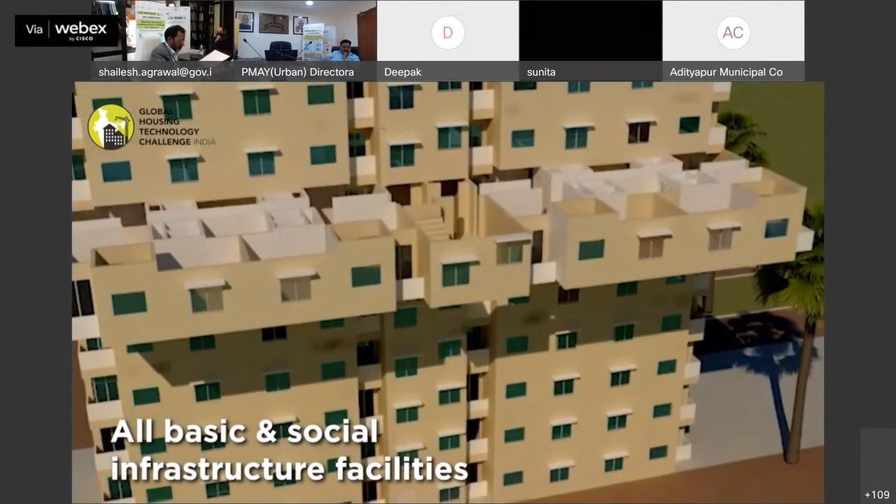A lighthouse project using precast concrete construction system, 3D volumetric, with 1008 dwelling units in G+8 configurations, along with all basic and social infrastructure facilities, is being constructed at Ranchi in partnership with the State Government of Jharkhand. The Honorable Prime Minister laid the foundation stones of 6 lighthouse projects, including at Ranchi, on 1st January 2021.

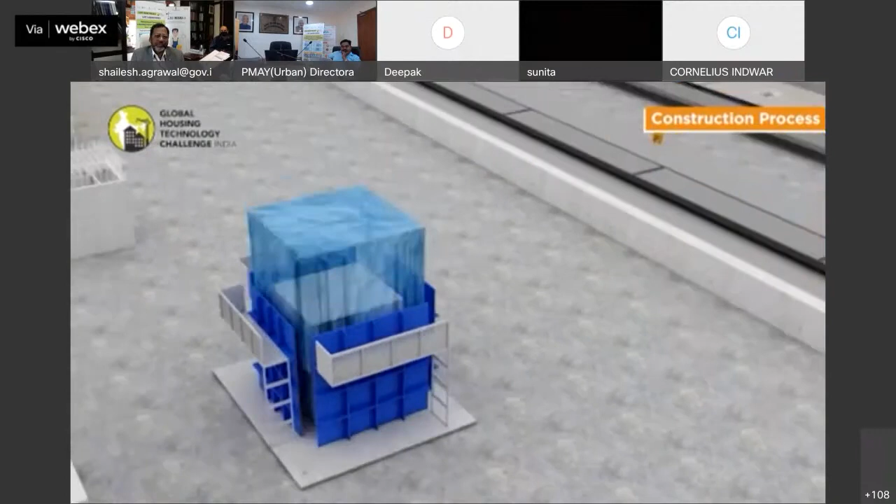Due to ground level issues, the actual construction work of LHP Ranchi could start only in August 2021. The construction work of this project is now in full swing. This 3D volumetric construction system is being used for the first time in construction of houses under PMAY-U. In this fast track system, solid precast structural modules like room, toilet, kitchen, bathroom, stairs, etc. are being cast monolithically in a casting yard at site under controlled conditions.

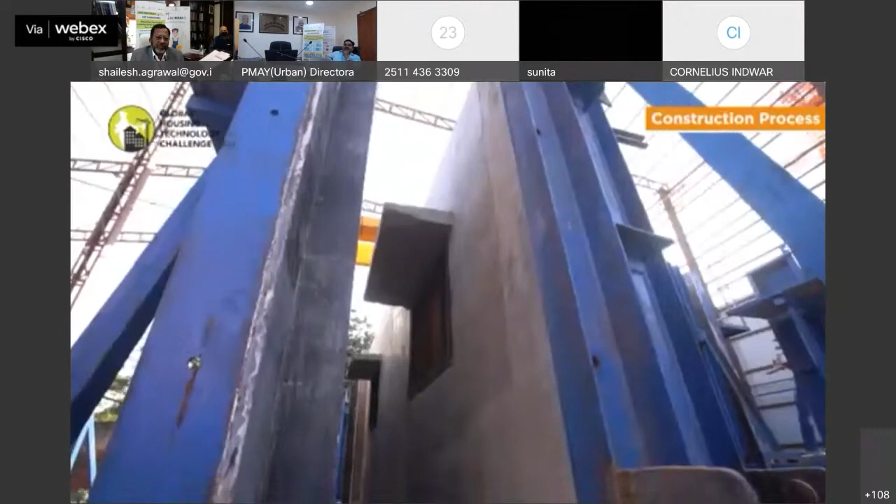In this modern system, construction begins with keeping the design foundation of the building ready while manufacturing of precast concrete structural modules takes place in the casting yard. Finished rooms, toilets, kitchens, and bathrooms are then installed at the site with the help of tower cranes. Gable end walls are positioned to terminate the sides of the building.

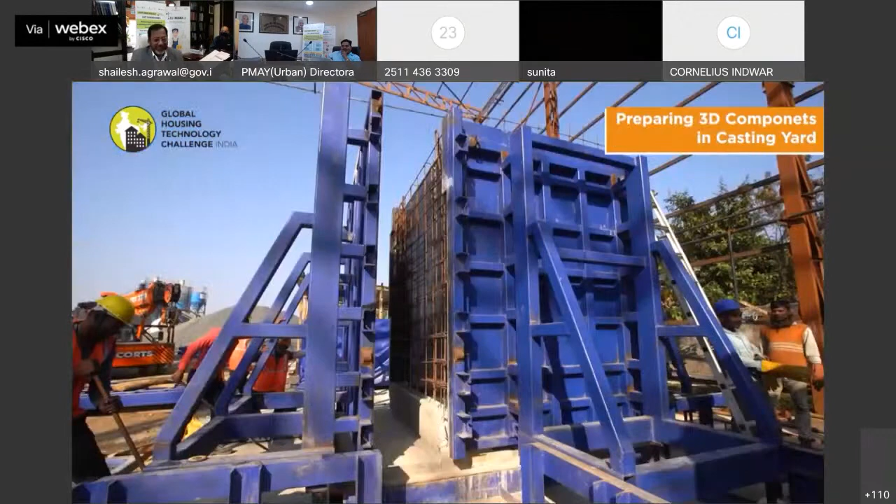Pre-stressed slabs are then installed as flooring elements. Rebar mesh is placed for structural screed, thereby connecting all the elements together. Consecutive floors are then built in a similar manner to complete the structure. About 90% of building work, including finishing work, is completed in the casting yard, which saves overall construction time.

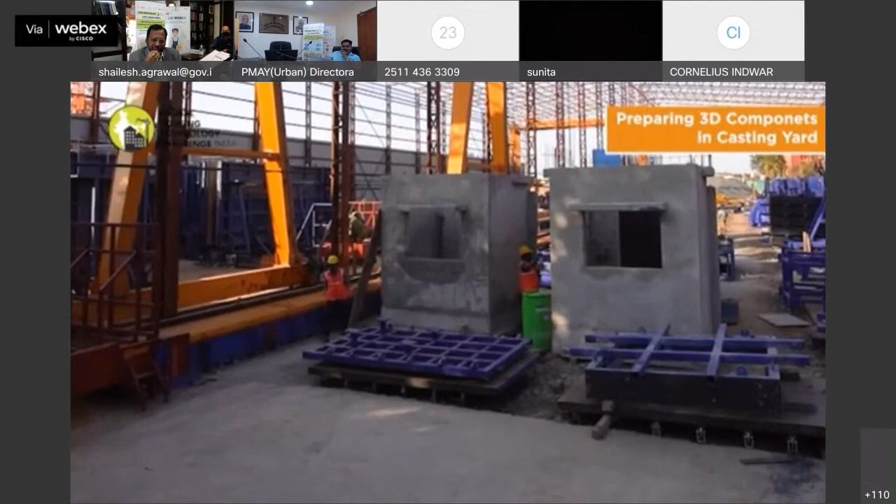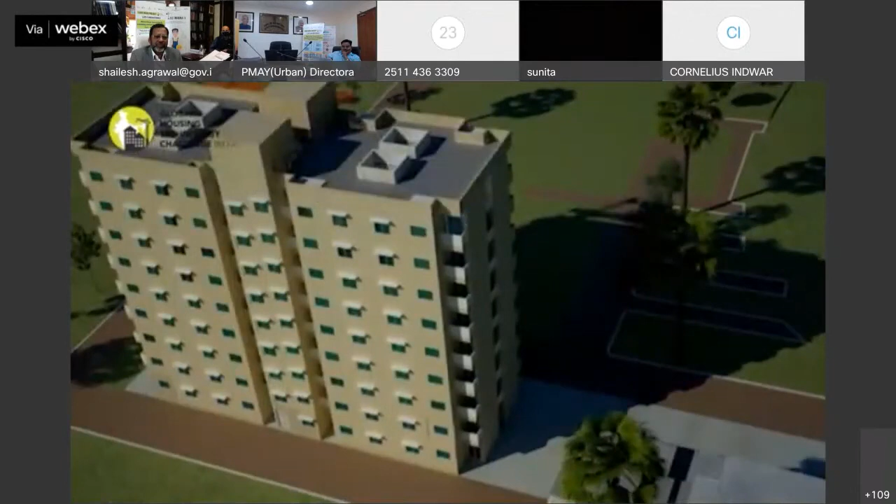The casting yard adjacent to the construction site in Ranchi, with all facilities, is now functional and is being used for the production of precast 3D and other components. While the casting yard facility was being established, raft foundations for all 7 towers were initiated, which are now at different stages of construction. Once foundation work up to the grade slab is completed in a tower, precast 3D components getting ready in the casting yard will be installed at the site to complete the tower. With all these parallel activities, the project is progressing well and is expected to be completed well within the stipulated time.

There is tremendous response for booking these houses by beneficiaries. The LHP Ranchi is serving as a live laboratory for learning. About 200 technocrats and other stakeholders have visited the site to learn the use of innovative technology in a real project at site.

So with this, let me start my first lecture. First, we will try to explain the 54 new construction systems which have been shortlisted by the Ministry of Housing and Urban Affairs through the Global Housing Technology Challenge, and I will quickly explain the 6 categories. After that, we will get into the LHP project at Ranchi and discuss with you in detail the technology being used in the lighthouse project at Ranchi.

So I will first explain all these 6 broad categories pictorially in a very simple way. This is just to give you the progress of Pradhan Mantri Awas Yojana.

Most of you might be aware, we're working with SLTC, CLTC, SLNA and others. The sanctioned houses are now more than 1.2 crores, out of which 95 lakh have already been grounded and 56 lakh have already been completed and delivered.

And believe me, this figure is changing dynamically very fast. Through PMAY, we are able to generate direct and indirect employment to the tune of 2.33 crores, and overall cement and steel consumption is also in million tons.

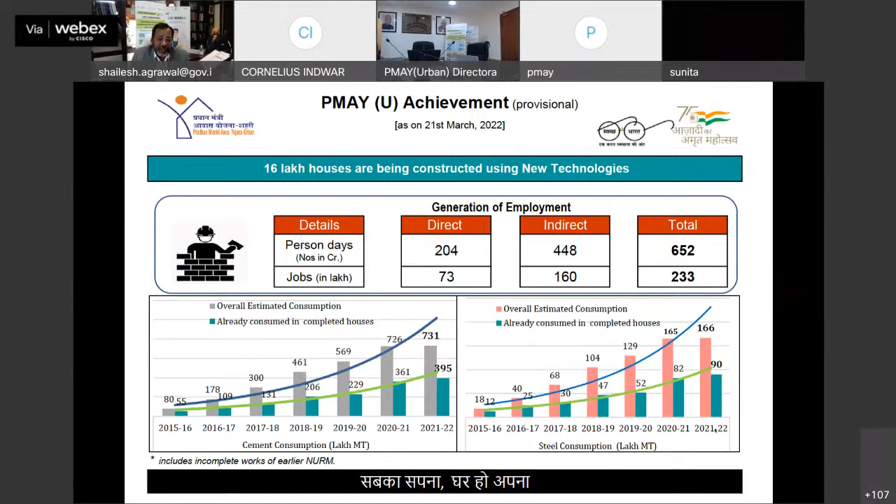Also, because we are running a technology mission under Pradhan Mantri Awas Yojana, through which new construction systems, alternate ways of construction, energy efficient and eco-friendly building materials and techniques are being promoted in various states, through that technology mission we are constructing 16 lakh houses using these new technologies, which I'm going to discuss with you.

This all started with the Global Housing Technology Challenge, organized on 2nd and 3rd March 2019. It was inaugurated by the Honorable Prime Minister, and during this challenge, we organized a big conference-cum-expo where more than 100 global technology providers participated and showcased their various innovative construction systems.

You might find the word 'challenge' here. The challenge thrown to the world was to share with us the technologies and construction systems which can help build the maximum number of houses in minimum time and minimum cost. So the challenge was: do we have that kind of technology or construction system?

Let me share with you that through the Global Housing Technology Challenge, we could identify 54 new construction systems, which are divided into six broad categories. I will definitely explain all these 6 technologies through pictures.

Right now, these 6 broad categories are being showcased at these 6 lighthouse project sites. So this is the basket of 54 technologies - depending upon your project requirement, time and cost, and the finance available, you can choose any one of these technologies suiting your requirement.

Another point I want to make is that while shortlisting these technologies, a technical evaluation committee was formed, comprising DG CPWD as its chairman, and persons from academic institutions, research institutions, PSUs, and other organizations. That committee shortlisted these 54 new technologies.

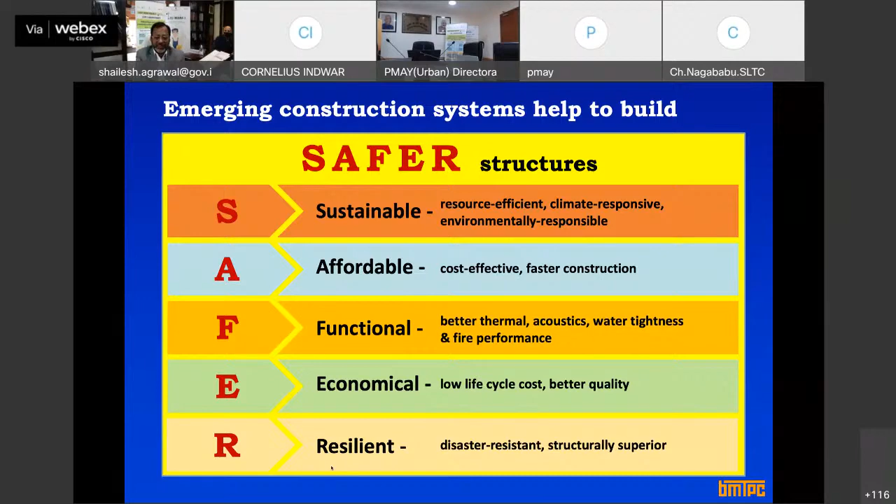There was also a study by the Energy and Resources Institute which says that by moving towards sustainable development, you can considerably reduce energy use, by 30 to 50%. You can also reduce water use.

You all know potable water is being used during construction, and that water reduction can be done up to 40% by taking the construction to the factory or offsite. It helps improve the environment or eco-friendliness, because we considerably reduce greenhouse gas emissions, and waste reduction is up to 75%.

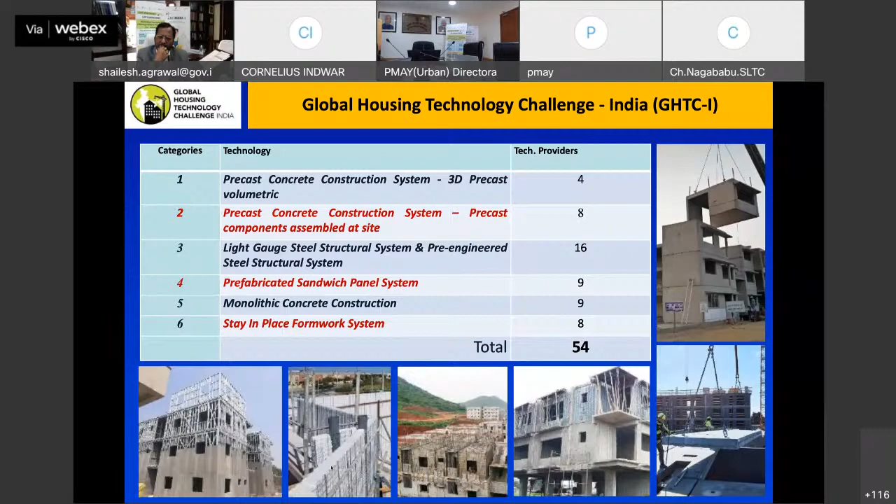So with this, let me explain these six construction systems. If you remember, I will go to that slide. These are the six systems, and I will explain pictorially, in very simple terms, all six technologies.

So first is 3D precast volumetric construction. You see here, in the right hand bottom portion, a picture which shows conventional construction. Normally construction takes place like this: cast-in-situ RCC frame construction, and then you have bricks, doors, windows.

What about this? Can't we replace this by a system where the entire room or entire module is made in the casting yard, in the factory, and then you put one over the other, like you put Lego blocks? So these are customized factory-made volumetric construction. You can have 4 walls, you can have both floors, or you can have one floor, depending upon the requirement. So this is 3D precast volumetric construction, replacing your RCC framed beams and columns by this 3D module, or a volumetric construction.

Why is it called 3D? Because it is a volumetric construction comprising of L, B, and H. So like this, you can construct the entire building, and this is what we are using in LHP Ranchi, which we will show you in a later part of the webinar.

These are the actual stages of 3D volumetric construction. What you have to do is prepare a reinforcement cage, then have a mold, and insert it - we will show you a live demonstration. This reinforcement cage is inserted into a mold, then concreting is done, and then the mold is demolded, and the entire module is taken out, cured, and transported to the site.

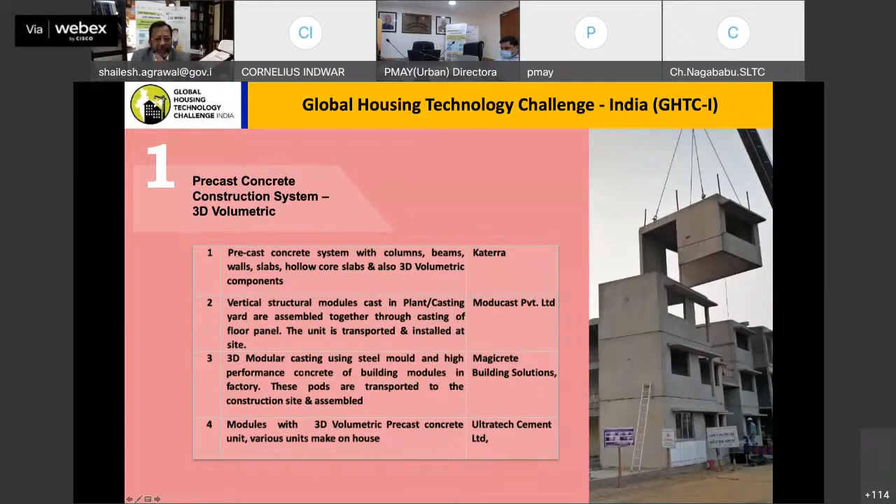Under 3D volumetric construction, through the Global Housing Technology Challenge, we could shortlist 4 agencies which are listed here. The project at Ranchi is being done by Magicrete Building Solutions, who are pioneers in bringing this technology to our country - 3D modular casting using steel mold and high performance concrete. So this is the Ranchi project. Anyway, we will go into the details of this project later.

Next is precast concrete construction. The difference from earlier is this: there we made a volumetric construction where we have all 4 walls, and a slab or without slab - so it's an enclosure, a module, or a block.

Whereas in 2D precast concrete construction, we just make 2D planar elements. It can be a beam, a column, a wall panel, a facade, a staircase. So all these structural elements, whether beam, column, or wall, are made in the casting yard or factory, and then transported to the site, erected, assembled, and used. So that is 2D precast concrete construction - you can see these elements.

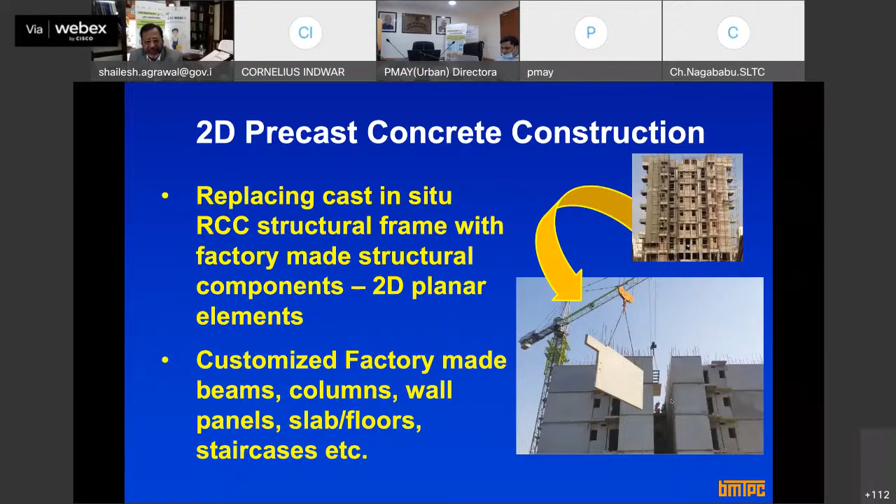So these are slab elements, this is a staircase element, this is a wall panel, this is a solid slab, this is a hollow core slab, these are spandrel beams, these are staircases. All these are cast in the factory and then jointed together to create a building or whatever shape you need.

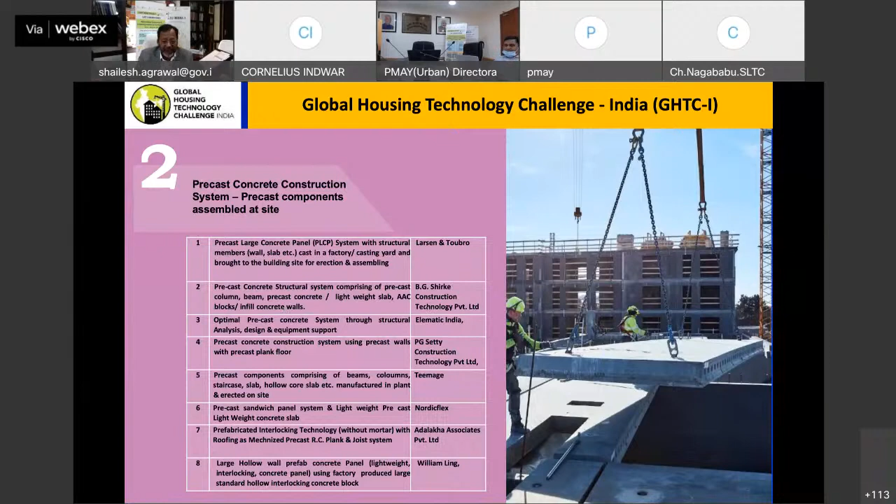Through the Global Housing Technology Challenge, 8 agencies were shortlisted, and we are using this technology in Chennai, where BG Shirke is doing the project. Already the project is more than 90% complete, and very soon it will be handed over to the state level nodal agency. So this is about precast concrete construction, and this is the progress.

You can see this beautiful photograph - this is the actual photograph from the site, and it was taken, I think, a week back. Now the progress has gone much further ahead.

So you can see this entire work is almost over. This is what is shown here: they make these columns and beams, and that casting yard is just adjacent to the site where casting of all these structural elements takes place. Let's move to the next category.

Next category is pre-engineered steel structural system and light gauge steel structural system, and this one we are using in 3 projects, namely Agartala, Lucknow and Indore. Here, instead of cast in situ RCC column and beam, we have factory made steel columns and beams.

These are steel built up sections. If you are interested, let me tell you that normally we have hot rolled steel sections - I sections, channel sections, or angle sections - which are hot rolled, and those shapes are ISI mark shapes.

But nowadays, with the advancement of manufacturing technology in steel, you can have built up sections, and the moment we have gone for built up sections, it has opened ample opportunities to make use of steel structural sections in building construction and other structures. So we get smaller built up sections, which can be rectangular, hollow, or square.

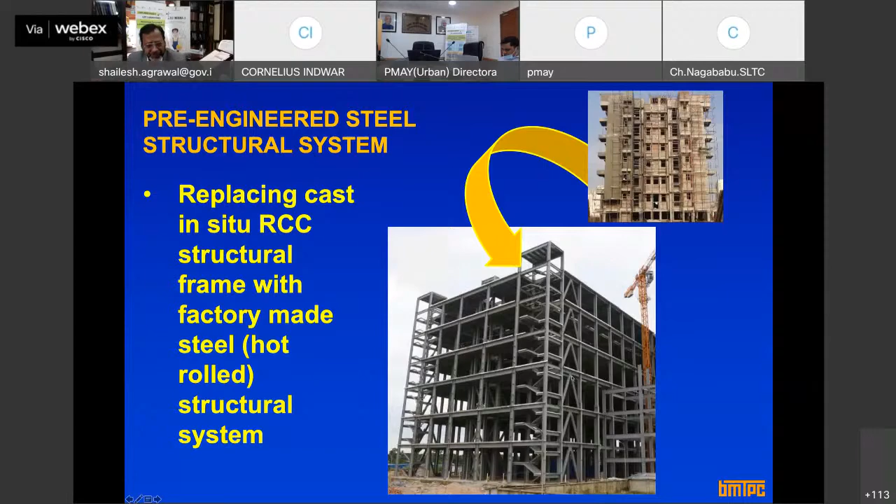These sections can act as beam and column. They are manufactured in the factory and then brought to the site and erected to create a steel structural system or skeleton of a building, which you can then fill with drywall construction. You can see this picture - this is steel, again from one of the project sites. These are those steel beam and columns, and then you have a slab, and this is the wall, the infill wall.

Another category is the light gauge steel structural system, which is being used in Agartala in combination with the steel structural system. So these are light gauge - this is cold form steel.

The manufacturing here is cold form, whereas hot rolled steel is manufactured where the steel is put in a furnace and melted, then rolled in hot form. Here it is cold formed through machines, and we also have a lighter section. That steel is then galvanized, so we get corrosion resistant, galvanized steel light gauge panels, which can act as walls as well as be used for laying floors.

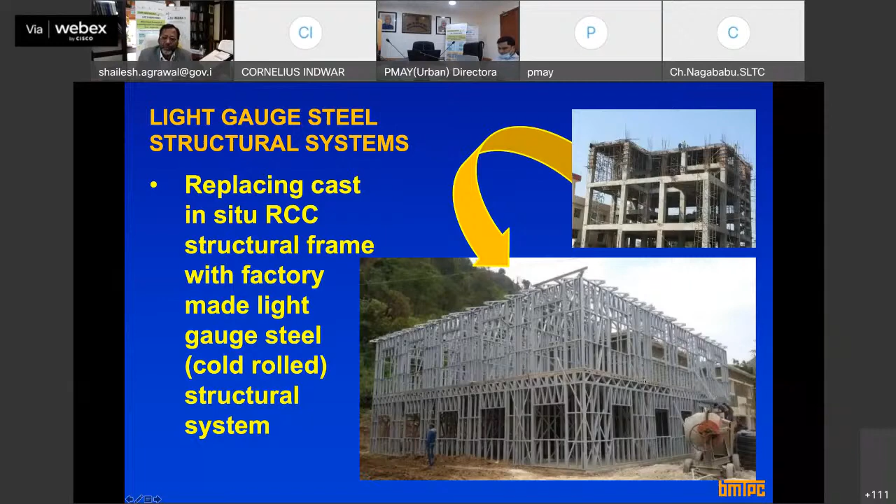This is the light gauge steel structural system being used in Agartala, and we have shortlisted 16 new agencies already working in this area of light gauge and steel structural systems. The project we are doing in Agartala is being done by... yeah, this is the company doing the Agartala project using steel and light gauge steel structural system.

This is that Agartala project I was talking about. If you can see this portion in the bottom right hand side, you'll see that this is the steel structural system used for the skeleton, and then the walls are made of light gauge panels - that is a light gauge panel being used here.

Now let's move to the next category: drywall construction, also known as sandwich panel system. There are many varieties of sandwich panel systems now available in India, and for the sake of clarity, we have divided them into 2 categories. One is the EPS panel system.

What you see here on the right hand side, top portion, is the EPS panel. This white thing is expanded polystyrene - it's a thermocol of high density. If I have to tell you casually, EPS is expanded polystyrene, but for your understanding, think of it as thermocol of high density.

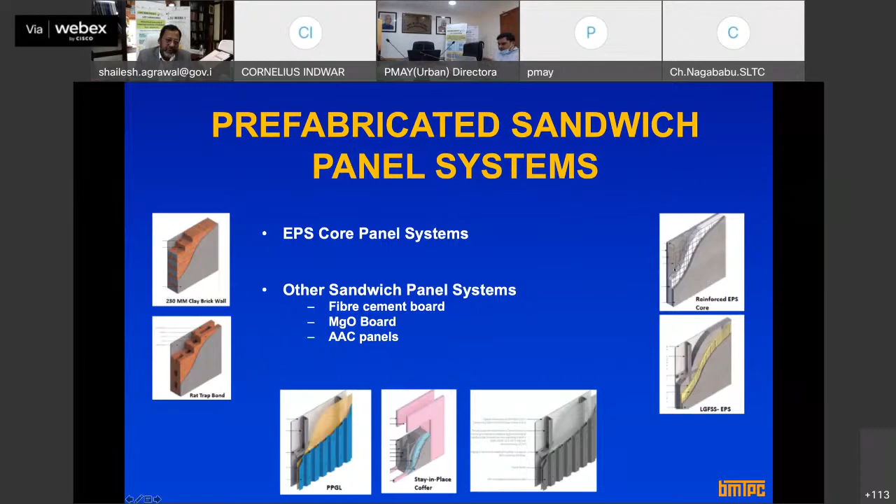So the light gauge steel structure I showed you can be put with these kinds of panels. You can see these panels here. This kind of traditional brick wall construction is being replaced by drywall made in the factory. All the openings you see, whether ventilator, window, or door, can be cut on site easily with the help of equipment, cutters and all.

Otherwise, they can also be cut in the factory and given to you in customized form. This is the EPS panel system I was talking about, and the white thing is the EPS panel. The core is sandwiched between two welded wire mesh, galvanized welded wire mesh, and then you do the plastering or you can do shotcreting.

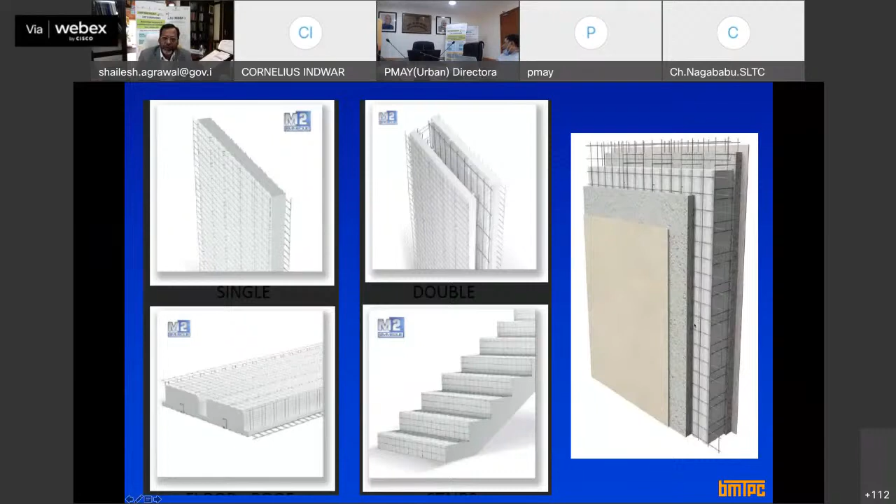This can be used as a staircase or as a slab, and you can do the plaster. You can put a fiberboard and all.

Through Global Housing Technologies, 9 agencies were shortlisted, and this technology is being used in Indore by the company Rising Japan Infra Private Limited. As I told you, these panels are named according to the outer skin and the core. So they are using an EPS cement sandwich panel system, which has calcium silicate board as outer skin, and in between they fill it with aerated concrete, a special kind of lightweight concrete. That is being used in Indore in a hybrid form along with the steel structure system.

It's shown here. This is the lighthouse project at Indore where that sandwich panel system technology is being used. These are the sandwich panel systems.

Now imagine instead of replacing your brick wall or stone masonry construction with these kinds of EPS panels, cement EPS panels, which are manufactured in the factory, you just put them through a slide and lock arrangement to create your wall, requiring no water, and it can be done pretty fast.

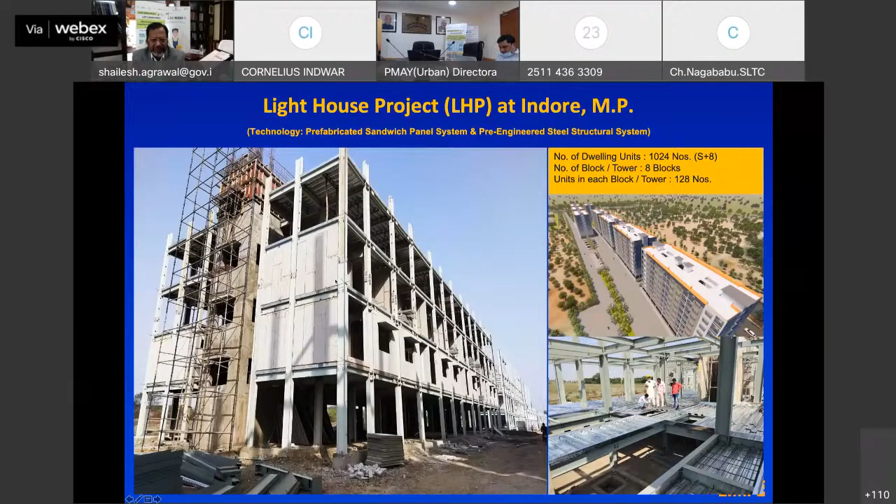This is the panel I was talking about from Rising Japan, which is being used in Indore. So what you see here is this panel, the aerated concrete sandwiched between two calcium silicate boards.

The next category is monolithic concrete construction, which all of you must be knowing. This is also known as aluminum formwork or Mivan. Mivan was the company which started this aluminum formwork in our country around 10 years back, and now we have more than 50 formwork manufacturers in our country.

This is customized formwork. Instead of having steel or plywood formwork made separately for your beam, column, and slab, for the entire house or module you can have customized aluminum formwork made, and then you put the reinforcement cage in a single pour. You can make the room or dwelling.

There were 9 companies or agencies shortlisted under the Housing Technology Challenge, and those are given here. The work we are doing in a project in Rajkot is given to Outinord, where we are using a tunnel formwork system.

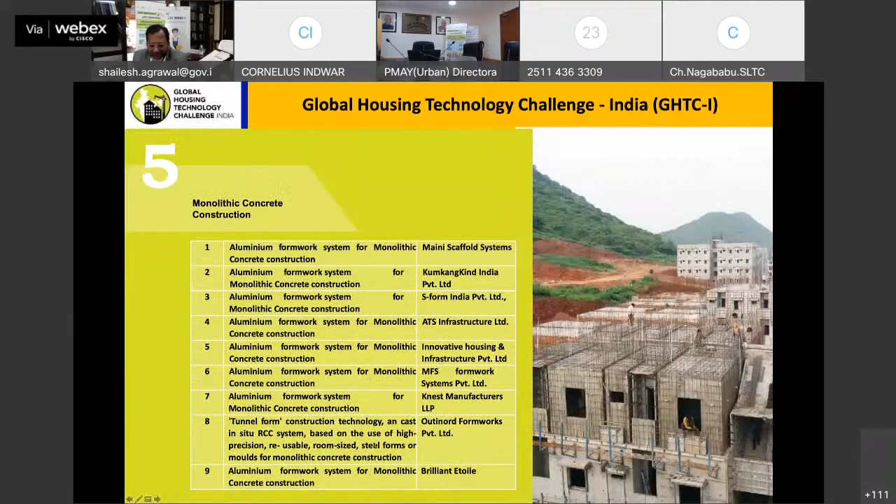The difference between tunnel form and this kind of formwork is that in monolithic concrete construction, we have formwork for all 4 walls, so we make the entire room at once. Whereas in tunnel formwork, it comes in the form of an L, so we make a slab and 2 walls, creating a tunnel kind of thing. The outer walls are later filled with AAC blocks or any other filler material. I will show you the picture.

So this is that formwork, it comes in this form and creates the tunnel. So all these tunnels on one floor, 8 dwelling units, are being cast in 3 days in Rajkot.

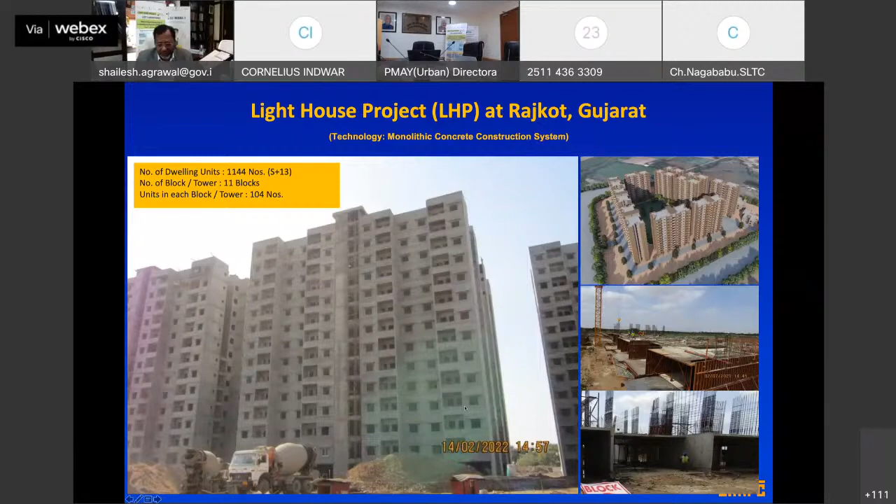You can see for yourself by visiting this project. So this is the tunnel formwork I was talking about, an inverted L kind of thing. You fix this formwork and create the tunnel kind of structure, and then later on, to create a room, you fill the outer walls with any kind of masonry.

The next system is the stay-in-place formwork system. Here the formwork is left in the structure, or it stays with the structure, which is why it's called a stay-in-place formwork system. It's also known as sacrificial formwork or lost formwork system.

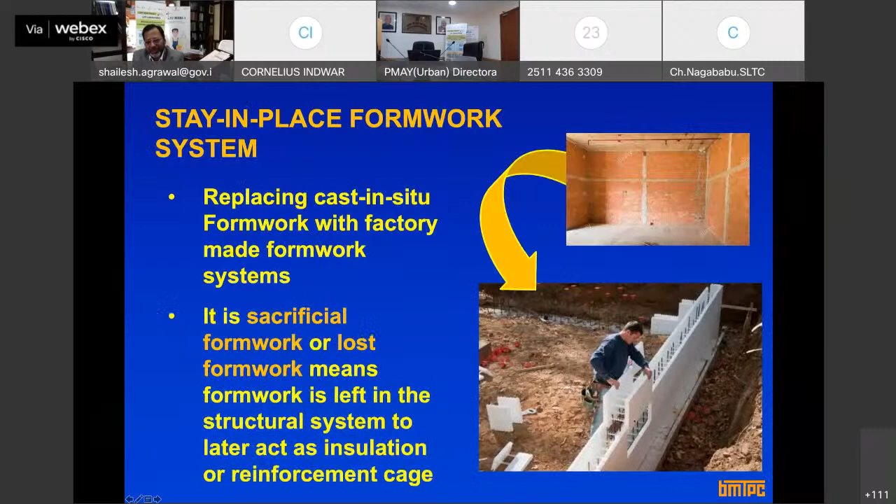Let me show you this picture. This is the formwork we're talking about. It comes in the form of blocks, customized and made in the factory. You put these blocks in a slide and lock arrangement to create this wall with openings cut as needed, and then fill it with concrete and do the plaster. So it acts first as formwork, and then as insulation to your building. That's why it's called insulating concrete formwork system or stay-in-place formwork system.

We could shortlist 8 agencies with this stay-in-place formwork system, and this technology is being used in Lucknow. The agency is Novel Assembler, who is using a PVC stay-in-place formwork system. These are pre-finished walls. I will show you a slide.

So these are pre-finished walls. It's like buying a wall, pre-finished, with different coloring options. You can buy the wall from the factory or from the market and just assemble it or install it to create a wall.

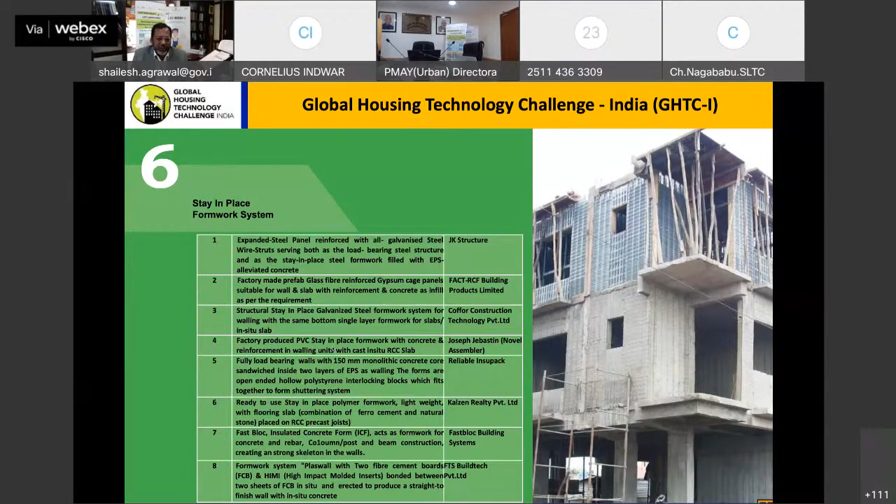This is being used in Lucknow, and let me show you this picture. This is the PVC wall form, and it's being used in a hybrid form because it's a high-rise structure—so it's a steel skeleton or beam and column, and the walls are of this PVC wall form.

This is the slide of the PVC wall form I am talking about. If you have difficulty remembering stay-in-place, you can just say pre-finished PVC wall or pre-finished walls.

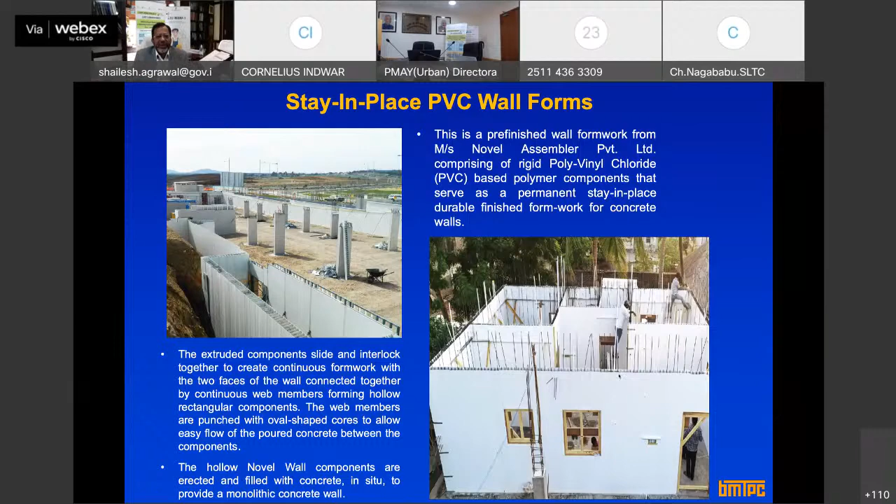The outer skins are of PVC, and these are cavities which can be filled with concrete or lightweight concrete, and you can put the reinforcement. As you can see here, the reinforcement bars are coming out of it, and you can create openings by cutting, and fill it with concrete as per your requirement. This is being used in the LHP project at Lucknow.

So this was all about those 6 technologies I mentioned, explained pictorially. In addition to this, the Government of India, through the Technology Sub-Mission, is also facilitating and promoting this. We are also handholding the state governments and their technical agencies, development boards, PWDs, and other agencies engaged in construction of buildings and infrastructure.

In Andhra Pradesh, Chhattisgarh, and others—like in Andhra Pradesh, we recommended monolithic construction, and several lakhs of houses are being constructed there with monolithic technology, and now they're using precast also. So across all these states, we are promoting these technologies, and if you require any handholding or clarification, you can always write to the ministry or to us, and we'll help you in selection of the technologies.

The idea here is we have a basket of 54 technologies, and as per your requirement, geoclimatic condition, finances available, and time, you can choose one of them. In order to create a suitable ecosystem for all these technologies, they have already been approved by CPWD and the Ministry of Housing and Urban Affairs, and a schedule of rates for most of these technologies has also been published. Around 1.6 million houses are being constructed across India using these technologies.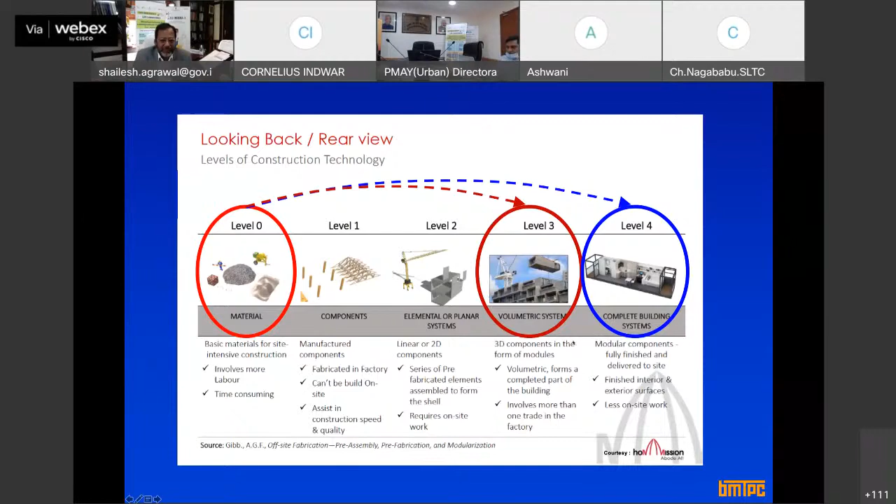So with this, let me end this first lecture, and now maybe we can start the next lecture. Manish? Yes, sir. Sir, I think your voice is muted.

Sorry. So the first lecture was all about the 54 new construction systems which we shortlisted and created a basket, and I explained pictorially those 6 broad categories. If you want more details of these technologies, you can register as a Technograhi - we are running an e-module, a certificate module, which gives you access to all the lectures and technical details. You can also go to the YouTube channel of BMTPC for audio-visual details about these technologies. For all 6 technologies, please visit the Ministry's website or BMTPC website, or our YouTube channel. You can also download certificates for these technologies, and the Delhi Schedule of Rates, which gives detailed specifications.

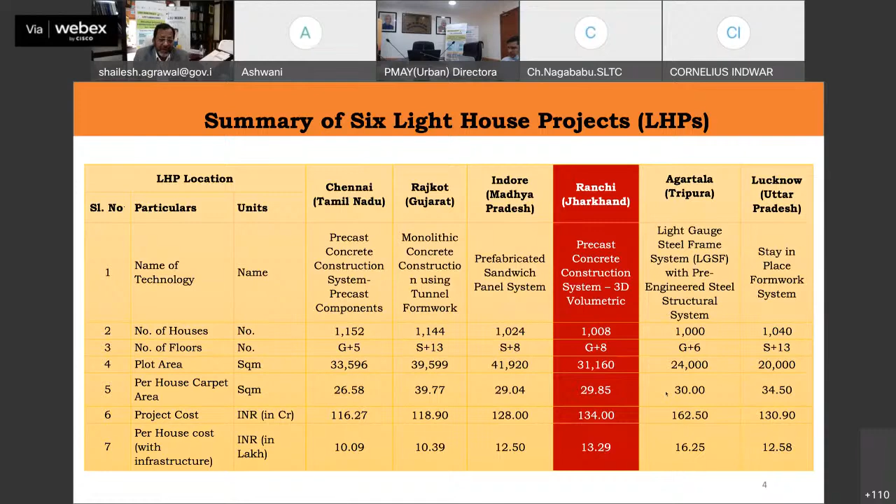These are the details of the 6 lighthouse projects we are doing. Today we discuss the Ranchi project, which comprises 1,008 dwelling units in G+8 configuration, with a project cost of 134 crore rupees. This is the first of its kind application of 3D volumetric construction in our country at such a large scale - 1,008 houses being constructed for the first time in India with this technology, in G+8 configuration.

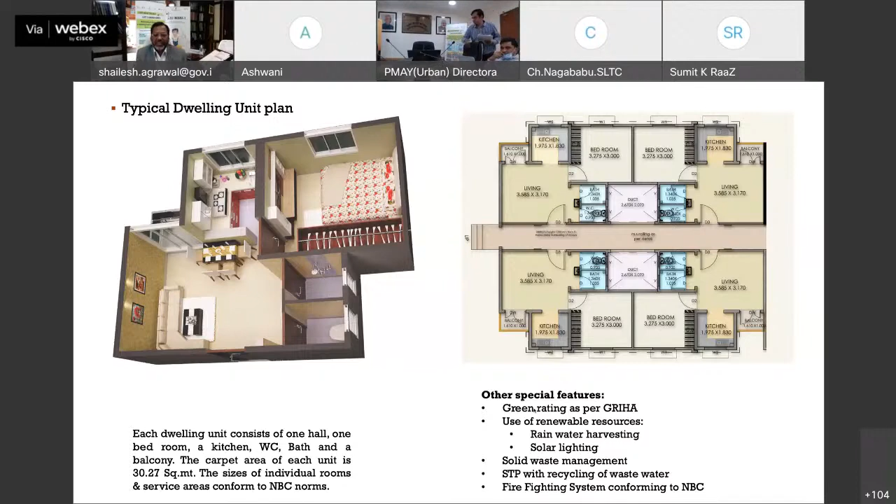Use of renewable resources is being promoted in terms of rainwater harvesting and solar lighting. Solid waste management is also part and parcel of all the lighthouse projects. Wastewater needs to be treated and reused for gardening and flushing purposes. All these projects, having 1,000+ houses, must have a sewage treatment plant and firefighting system because these are high-rise structures conforming to NBC.

Then on a foundation, they are assembled and erected, along with the services. You can either put the services in the casting yard or at the site—it all depends. Here, 70 to 80% of the work is done in the casting yard and then brought to the site.

Door openings and so on can be created in the casting yard, and you can even put in windows and other things—that's the next level, where you can have a pre-finished house. But in this project, we are creating the openings and putting the services in the casting yard, then bringing it to the site and putting one over the other to create the entire building unit.

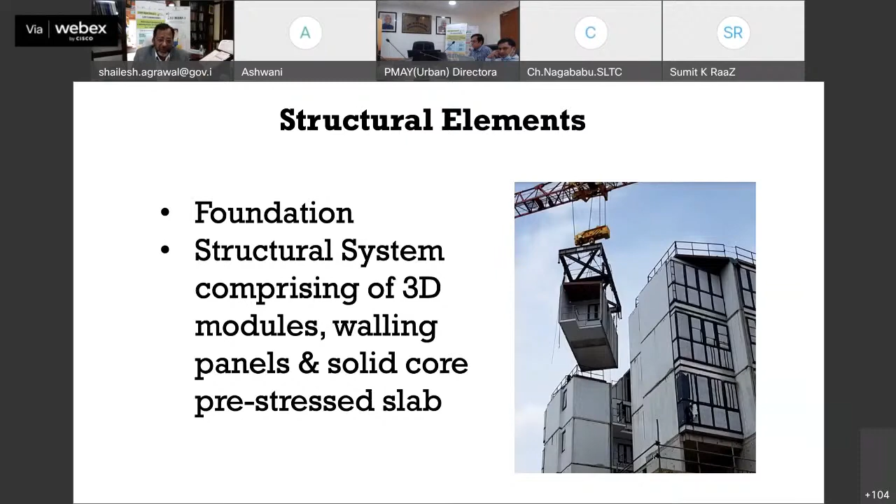Now let me explain the systems. Any building comprises a superstructure and substructure. The substructure is the structure below the plinth and below the ground. The superstructure is whatever we have above ground, explained in terms of structural system comprising beams, columns, structural system, and walling. The foundation is below that superstructure.

For all these projects, we are using conventional foundations. If you are a civil engineer or architect, you understand conventional foundations are of different types—it can be isolated footing, combined footing, raft, or pile foundation. Here we are using a raft because it's a 3D volumetric construction, as advised by the consultant.

If you have a rocky terrain, you can have isolated footings. If you have alluvial soil, you can go for raft or any other kind of foundation. It strictly depends on the geotechnical or soil investigation, bearing capacity, and depth of the foundation is decided based on the soil strata and the water table.

So we have a raft, and over that raft these shear walls are constructed, and they terminate at the plinth, and then these walls will be filled. We come to the finished ground level, and at the finished ground level these starter bars are left, and these starter bars will be connected with the modules which will come over.

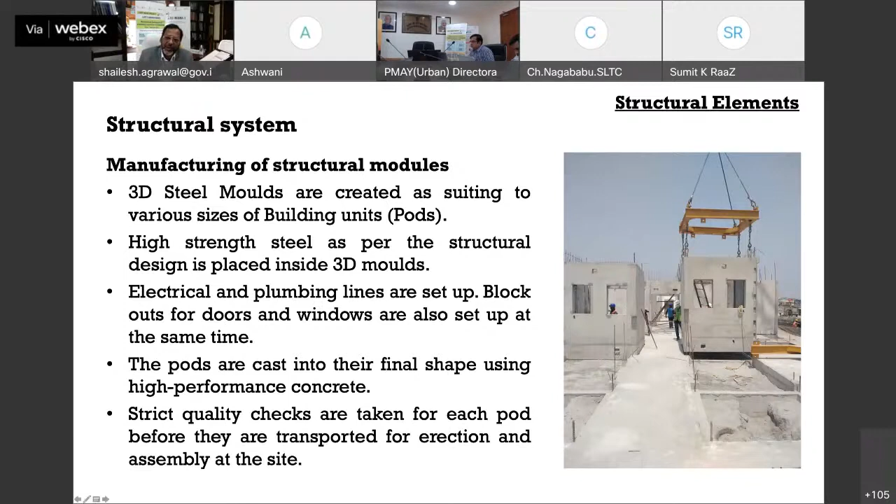They are not only manufacturing this 3D volumetric construction here, they are also casting different kinds, like pre-stressed slabs, to have monolithic behavior and to ensure structural integrity. The project is being done, and they are not only casting 3D volumetric modules, but also casting a few shear walls as well as pre-stressed slabs.

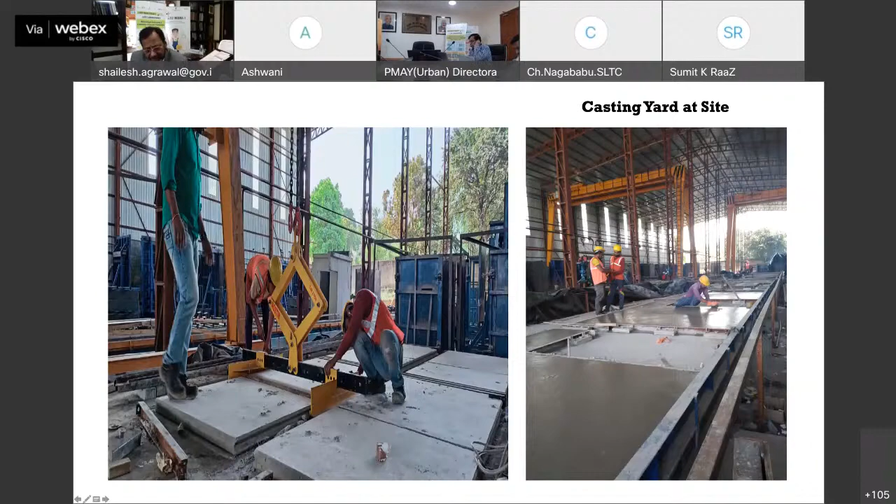Let me not go into the advantages in detail, but all of you will agree that most of the work is being done in the casting yard. It's pretty fast, and being fast track construction, you have resource optimization, improved quality, and top class finish. There's no need for extra finishing, you can directly paint it by putting some putty kind of thing.

There is no need to do plaster at all. Also, being a monolithic construction, because all the walls are cast together, it is excellent as far as disaster resilience or earthquake resistance is concerned.

There is no wastage of material, wastage is minimized, dust free, pollution free. You are using water optimally because the entire thing is done in the factory. You are completely eliminating shuttering and scaffolding material, and they are replaced by tower cranes and such, through which you lift these components.

The essential requirement for this technology is this: you can see you require a space, because a casting yard is required to be established near the site. So you require a space.

So here in the Ranchi project, the agency was provided with casting yard space adjacent to the site, and in that space they have set up the casting yard, where they are casting all different kinds of structural elements, including this 3D volumetric modules.

You require a wide road so that through cranes and trailers, you can transport these modules to the site. So you need an approach road to the site, and minimum widths of rooms and roads, so that high capacity trailers and cranes can move freely there.

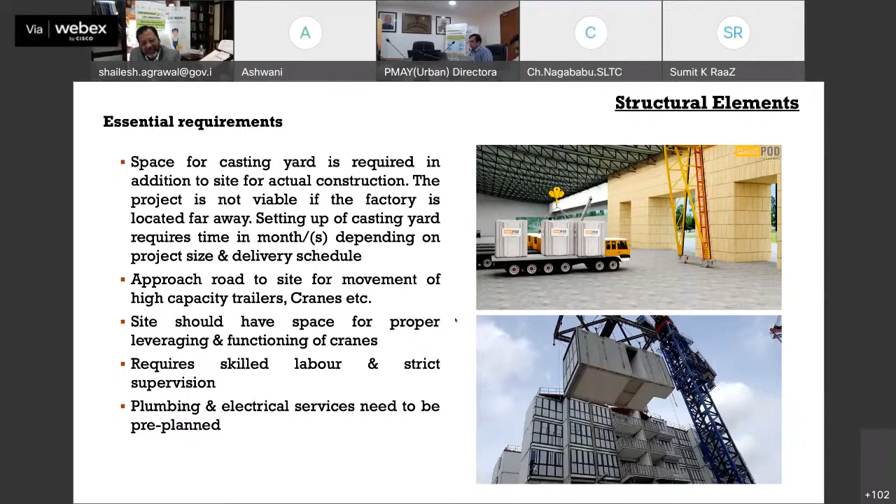Quickly let me tell you that all these lighthouse projects are awarded on a design-build basis. Design-build basis means we give our specification and requirement, along with the plot, and then agencies are asked to design and build. That is called design-build, or EPC contracting system. Through that system, these projects are awarded.

Here we have SGC Magicrete, which is one of the pioneer agencies in this 3D volumetric construction. They are also famous for producing AAC blocks and AAC panels. So that is the agency doing this project, and I think they are also present right now in this webinar.

Just for academic interest, I will show you, when we are doing design and build basis, we have to strictly follow the design done by the company or agency, and then the design is normally vetted.

So in all these lighthouse projects, we are getting the design vetted by IITs. The design given to us by Magicrete or by the agency, we ask the agency only to get this vetted through IITs. So these designs, being new technologies, we are getting vetted.

Whenever we do the design, a very important component is the design basis report. All of you who are structural engineers and civil engineers know our country is being visited by earthquakes recurrently. Time and again we have earthquakes, and it was found that most of the time when we get sanctions for our houses, they are done on an architectural drawing basis. So later on, the design basis report was made a part of approval.

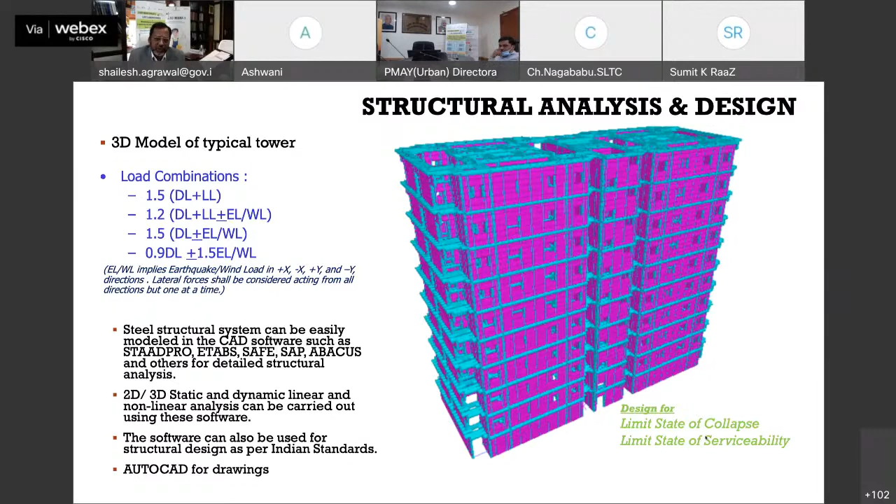Another limit state is serviceability. Suppose the service life of the building is 70 years, so the building will remain serviceable during the entire life. So the design is based on these two premises. If we keep strict quality control and quality assurance, we can always achieve this limit state of collapse and limit state of serviceability. Now the difficult part is over.

I will show you the simple part now through pictures, the construction sequence. First you make the foundation, and side by side, concurrently, you are manufacturing the structural modules in the factory. Then you install them on the already laid foundation. As I told you, you come to the finished floor level at the ground, and over that you have some starter bars, and bars in the modules. Those are connected, and these modules are erected.

Here, what we are doing is making these modules without slabs. So once these modules are laid, then over that we put precast slabs. Those are pre-stressed precast slabs, and some remaining walls are also put here. So the idea is to have structural integrity and monolithic action.

A few elements like the toilet pod and a room are cast in 3D, and a few things are cast as shear walls, 2D shear walls, and then a slab is cast separately. All these things are positioned on the already laid floor, and then joined together to have a strict integral action.

While putting all the modules and the slab, we put a nominal reinforcement and a structural screed over the pre-cast, pre-stressed slab. Our dwelling unit consists of 2 rooms, bath, and kitchen. So bath and kitchen are made separately, then the corridor is made in the form of a shear wall. I will show you all this through a picture as well. So they are cast, then placed, and then slab is put, and over that slab, screed is put with reinforcement, so that all of them are connected together.

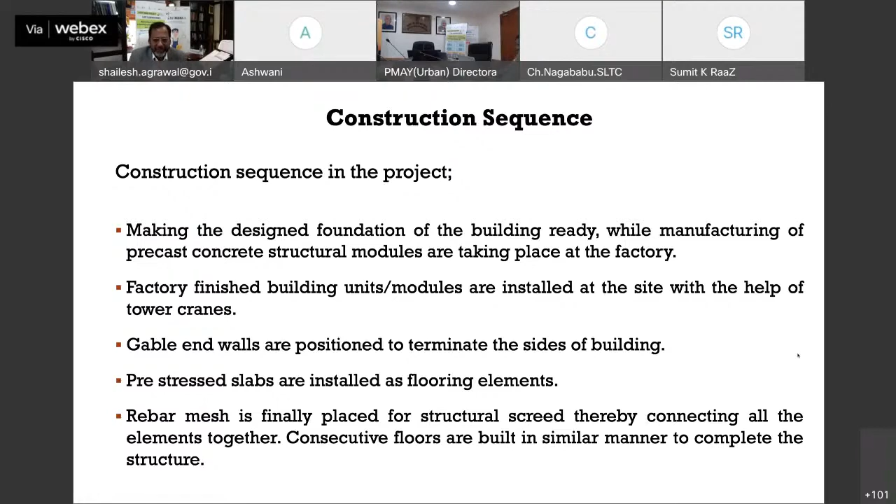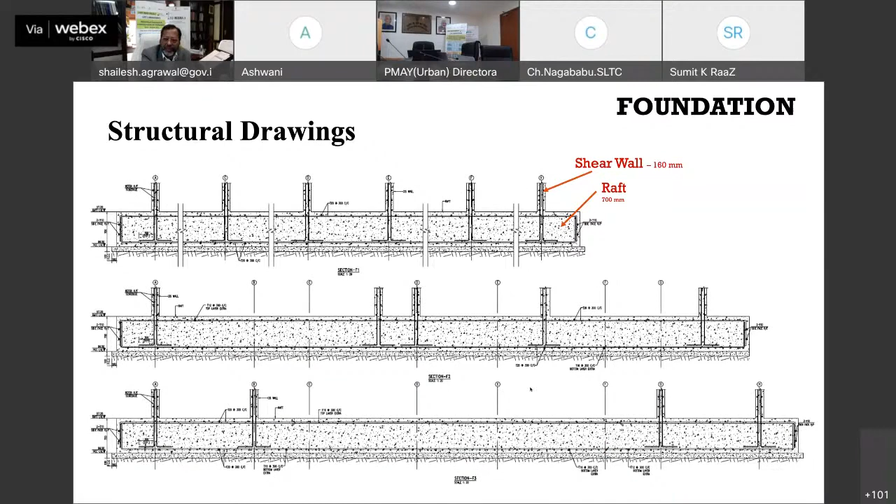I have a slide to show you - this is the structural drawing. I will not get into detail, but this gives you an idea that this is the raft. So for the typical floor plan, you have a raft of 700 mm, and what you see here are the shear walls. This is just a section. The shear walls have a thickness of 160 mm, whereas the raft is 700 mm.

This is the mix design. Let me also tell you, here we are using slag cement, which is different from ordinary Portland cement. Slag cement has supplementary cementitious material in the form of slag, which is a byproduct of a steel plant. That slag has pozzolanic property, so it can be added into the cement. By utilizing that slag, a byproduct of waste, we are making the concrete green and sustainable. This kind of mix design is a good practice so you can optimally utilize different precious materials, whether cement, water, aggregate or sand.

You see here we are also using fly ash - 658 kg in M30 mix, fly ash is being used. So that much cement is being replaced by fly ash, which is again a good and sustainable practice.

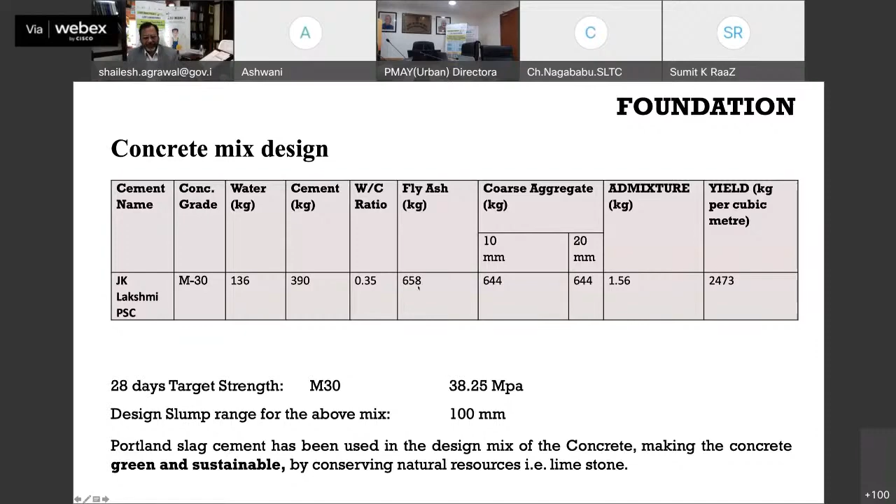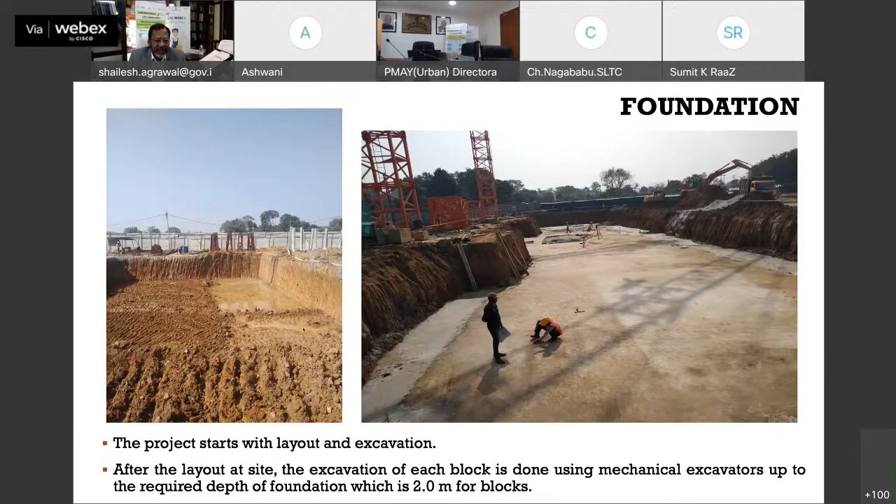Now let's go to the foundation - this was also explained in the film. Before getting the foundation ready, you have to excavate up to the depth of the foundation, then do the layout, and after the layout you have to put the PCC.

PCC is plain cement concrete, normally of M10 grade. So PCC of 100 mm thickness is being put, because the ground is undulating, so you need a plain surface. For that, PCC is being put.

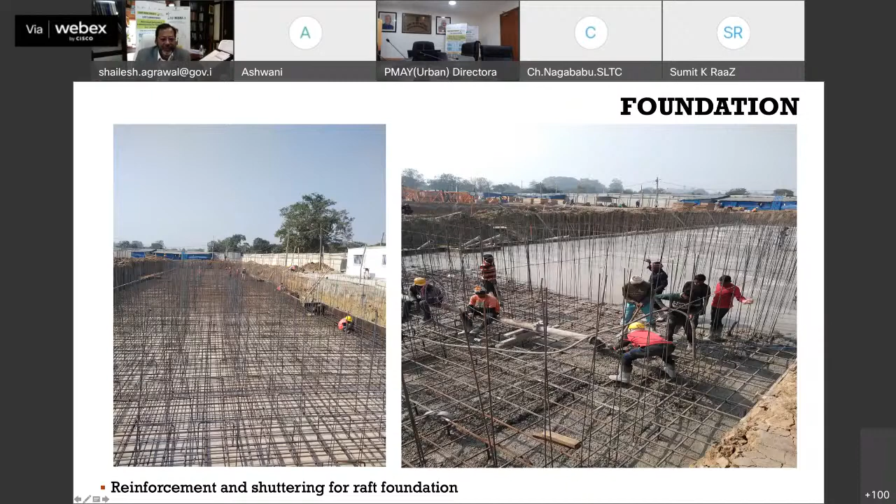After that PCC, you put the reinforcement for the raft, because we have a raft foundation. These vertical bars are for the shear walls, left vertically wherever we have shear walls. After laying this reinforcement, you lay the raft foundation. Here the reinforcement was laid, then concreting is done, as shown on the right, and this is the finished raft foundation for all the blocks with M30.

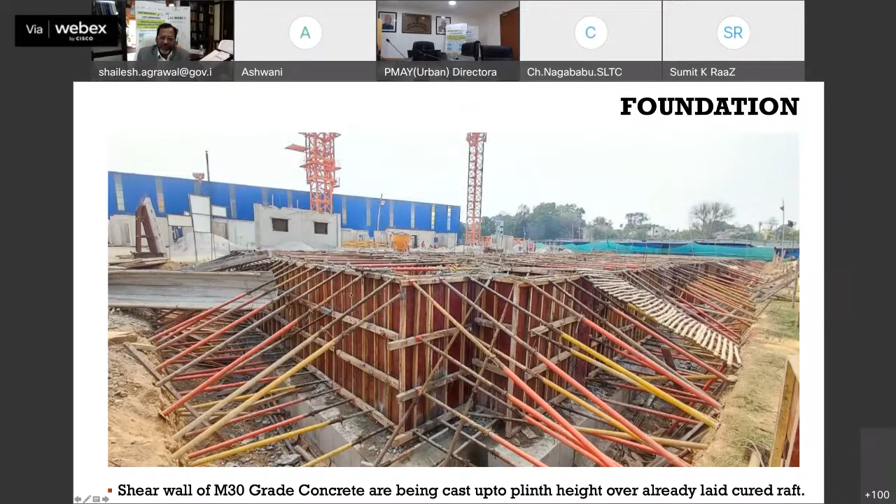This is a 700 mm thick raft, and now we will have a shear wall here. To cast this shear wall, we put the shuttering and then do the concreting. This is the shuttering being put for the shear wall. What you see in the bottom is the 700 mm raft. Over that we've put the reinforcement, then we'll put additional reinforcement and do the concreting, and remove the formwork to get the shear wall. So this is a closer look.

This is the shear wall, 160 mm thick, and now this shuttering is being removed. So this is what you get, and this is your plinth level or finished ground level. Over this, those volumetric 3D modules will come to create the entire floor with several 16 units.

So this is the plinth framing plan. These are the positions of those pod elements wherever they will come, and these are the plinth beams. At the ground level, at the plinth level, a plinth beam is being cast so that the entire floor is connected together.

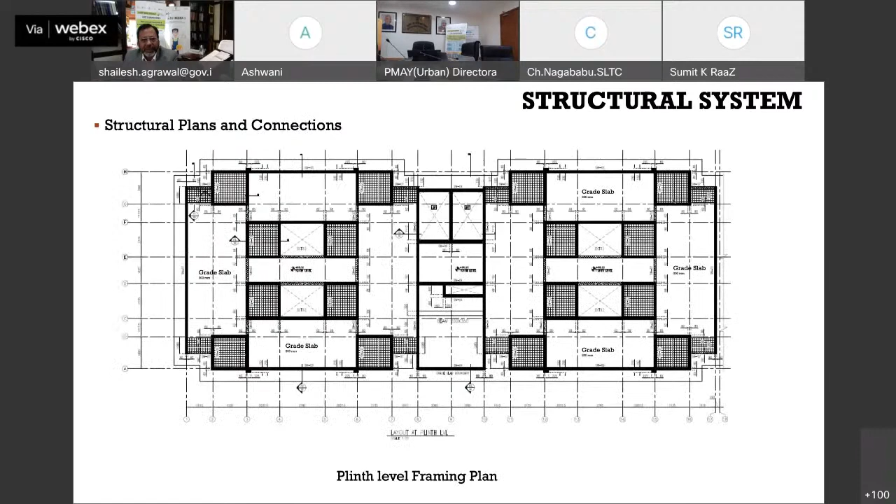Let me not get into how all these modules, when put together, are jointed. There are different kinds of joints available. One is mechanical joint, where jointing is done through nut and bolts. There are emulative joints, which are similar to what you have in monolithic concrete, in cast-in-situ RCC beam and frame construction. There, you leave the reinforcement of beam and column, and do the casting at the sides to get monolithic concrete construction. In a similar fashion, I'm not going into the details, but these drawings you can always refer to.

What we are doing is leaving dowel bars in different modules, and those dowel bars are connected and grouted through a sleeve with a non-shrink grout. So these are steel bars of two modules connected together, and the grouting is done to achieve monolithicity. The different kinds of joints - horizontal, vertical, L joints - are all designed together. When you connect two modules, this kind of thing is done with the screed and all, so I'm not going into those details.

So this is the sleeve I was talking about. This kind of starter bar is left, and there is a bar from the upper module, and then they are connected through the base plate and all.

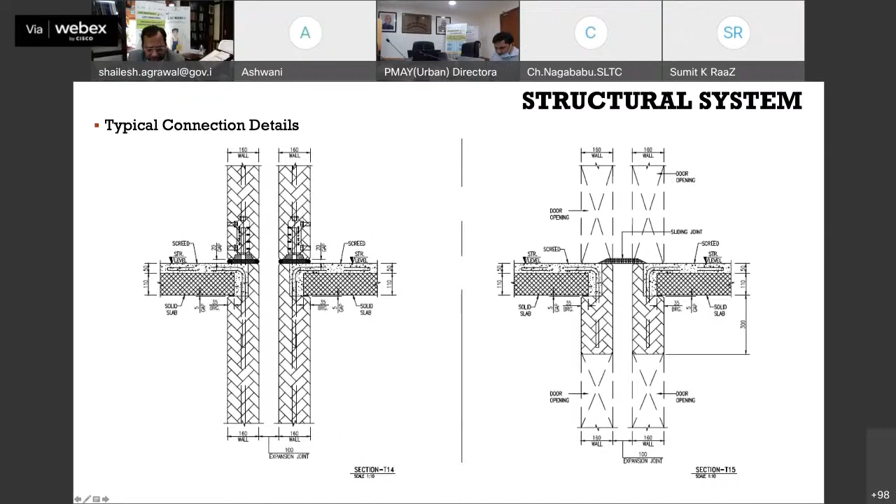Now let me show you this. Once we have come up to the ground level with the plinth beam and grade slab, then these modules, which are erected and cast in the factory, are brought here. First, all these 3D modules are erected. So first you have what you see in the uppermost left portion - that is the plinth beam and grade slab I'm talking about. And now we are putting these 3D modules here.

Once we have put these 3D modules, the remaining places require a wall here, a wall here, a wall here, and a wall here.

So these walls are also being cast in the casting yard, and they are being put here. You put a wall here, and then to connect this, another element is being cast and put here. So first 3D volumes, then 2D planar elements in form of shear walls are being put. This makes it ready.

Now what we have to do is connect all of them by putting a precast slab. This is the third stage. So precast slabs are being put like this. Once you put these precast slabs, then you put reinforcement over this and do the screed concrete, so that the entire unit plan acts in unison.

Once this is over, the same thing is repeated. Let me show you again. This is the ground plan. Over the ground plan, you are erecting those 3D modules, and the left spaces are filled with already precast walls. Then over these walls, you put this pre-stressed precast slab, do the screeding, and start putting the other floor.

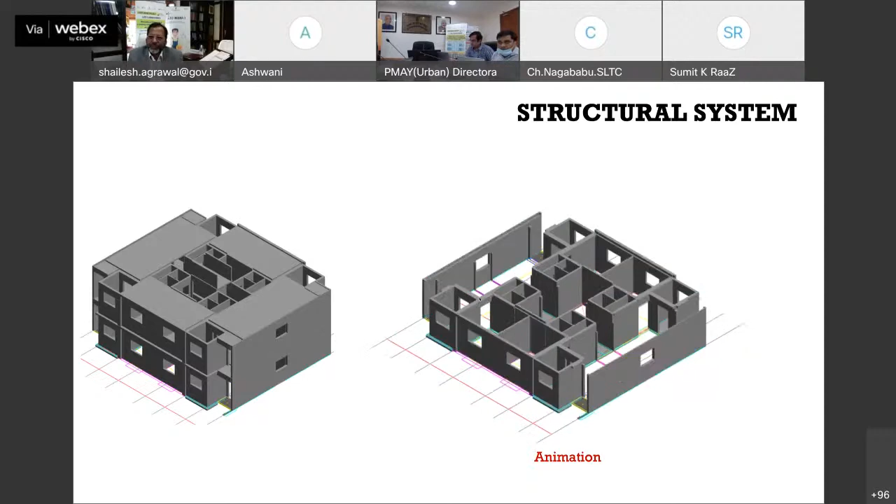So first 3D, then 2D elements, then other remaining 2D elements. Now this is ready for a floor. Now slab, pre-stressed slab, is being put. Then you go to the next story, and like that you do. I think this is understood.

Now these are the actual pictures of the progress being done. You see how you leave the shear keys. These are the shear keys which are left in the structure during casting, and that's how it is connected with the grade slab.

So these are those 3D volumetric modules comprising basically of a reinforced RCC shear wall of 160 mm thickness, with openings and services being put. And now this is being erected here like this. You can see it differently. So like this, different modules are being put.

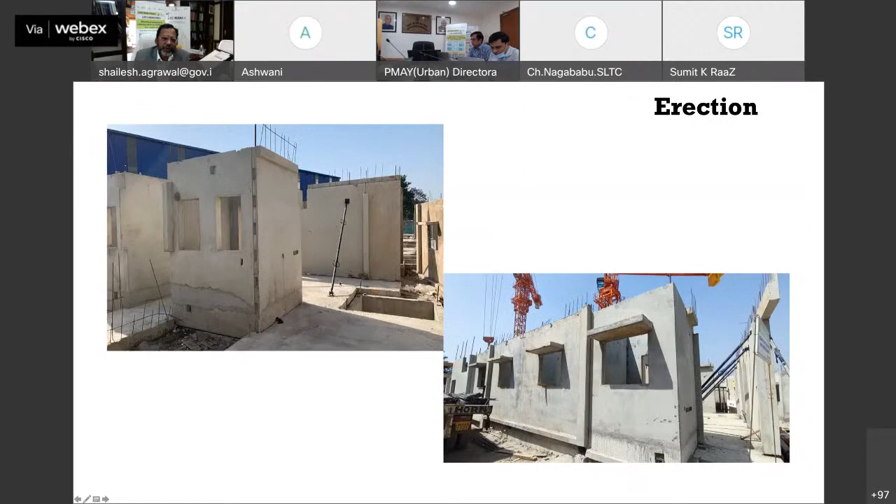You can see, this is again a picture of erection, showing how erection is being done. And when you do the erection, you have to provide temporary scaffold, temporary props. These are special kinds of temporary props so that this is not dislodged.

You can see here, these are the walls. This was that 3D precast element, and these are those shear wall elements. What you see in the corner is that tongue and groove kind of thing which is left, and then the shear key will come from the other side to create a monolithic concrete construction.

Then we have these starter bars. These starter bars will be inserted, and then you have a sleeve, and through that sleeve you will put a non-shrink grout. These are those walls with troughs. You can see here, another view, you can see.

So that is all for this project. What you see here are these starting bars which I was talking about. So that is all about this project.

And with this, now we will take you to the project site, and we will ask the technology provider to explain you the various activities being undertaken at the project site. So Manish, if you are there, can you take them to the project site?

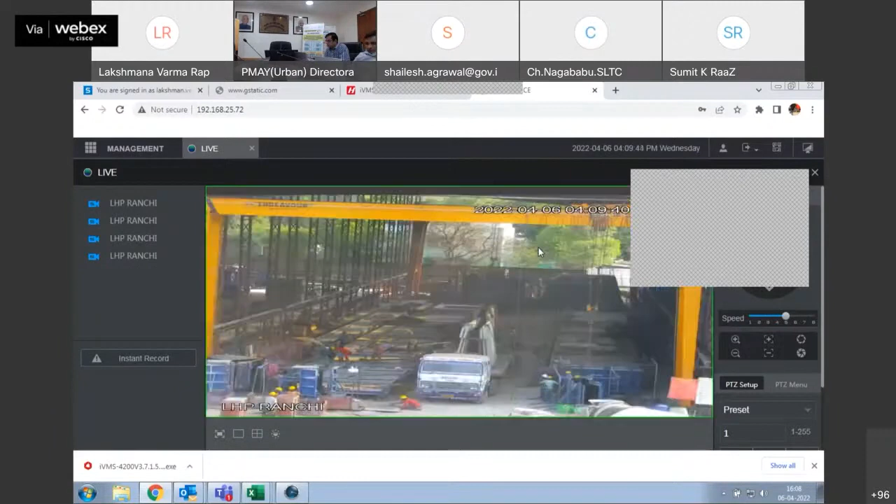So this is the casting yard where we produce our 2D and 3D elements. For now, they have loaded some walls on the trailer for dispatch to the stockyard. Can you make it full screen, Vitrang?

So this is camera number 1, where the entire work of the casting yard is visible. These are the platforms, these are the tables, and this is the pre-stress casting bed for the pre-stress slab, where we cast the pre-stress slab. On these tables, we cast the 2D walls. These are the 3D molds, where we cast our I mold and X mold. And on this side also we have tables where we cast our 2D elements.

These are the non-load bearing walls. Basically, these are the living room entry walls, so we'll install them at the entry of the apartment.

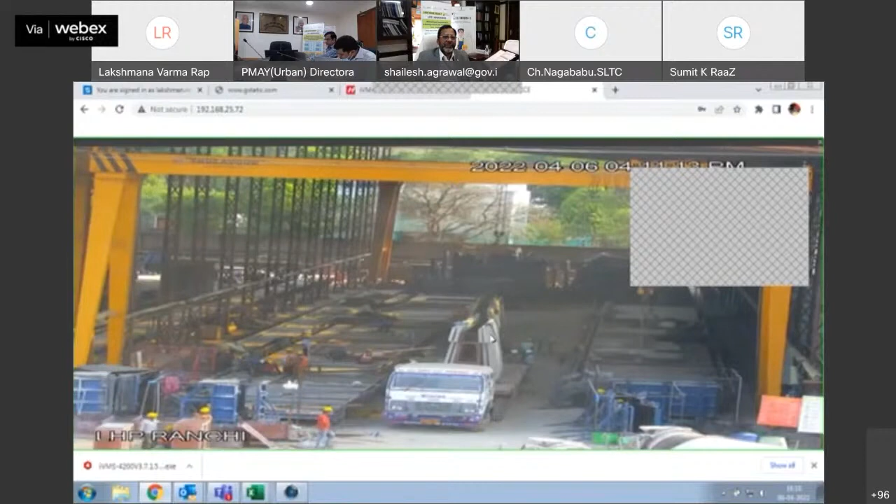So from the casting yard, we load the casted and cured elements onto the trailer, and then we transport them to the stockyard, and some of the elements directly to the erection location.

In this camera, you can see the 3D element is loaded on the trailer, and from here we will lift it and erect it. Here you will see the erection sequence.

So they are lifting the element, lifted it from the trailer, and now they will take it to its location. So you are actually showing the lifting of the unit. Yes, lifting this I section. After installation, it will create 2 bedrooms.

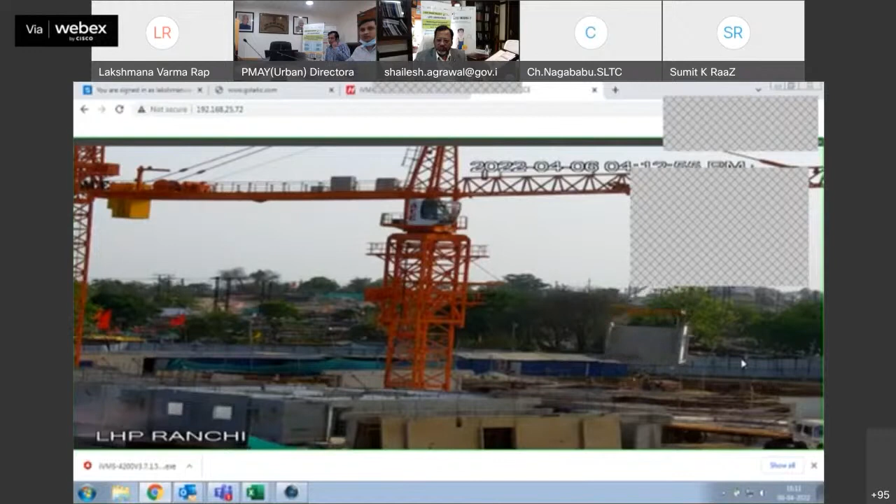So if you see this, you can see 2 windows here, one for each bedroom, and this is the separation wall.

You can see now, they are shifting it.

So from lifting to the installation of the element, the complete cycle is 20 to 30 minutes. So within 20 to 30 minutes, we install this element, and basically 2 bedrooms are ready.

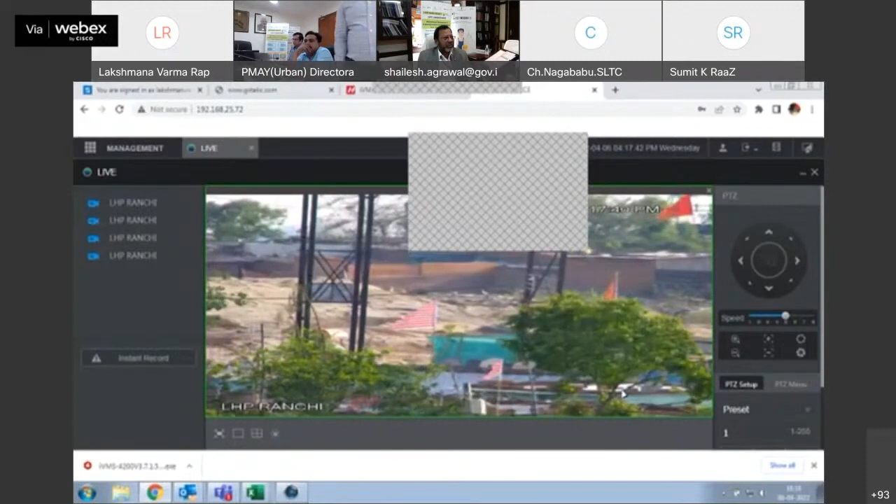I think you selected the wrong camera. No sir, same camera only, it's because of internet issue. Zoom in - it got too much.

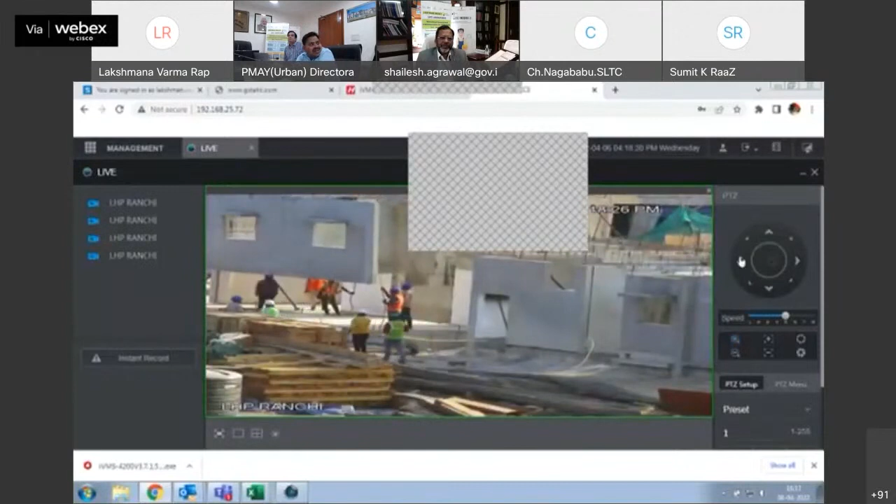So here you can see these are the dowel bars, for the mechanical connection. We have couplers already inserted into the element. So those couplers will be aligned and inserted onto these dowel bars, and then from inside we will do the non-shrink grout with the pressure pump, and that will create the final structural connection.

So now the element is there, and the team will align the element and insert it onto the dowel bar.

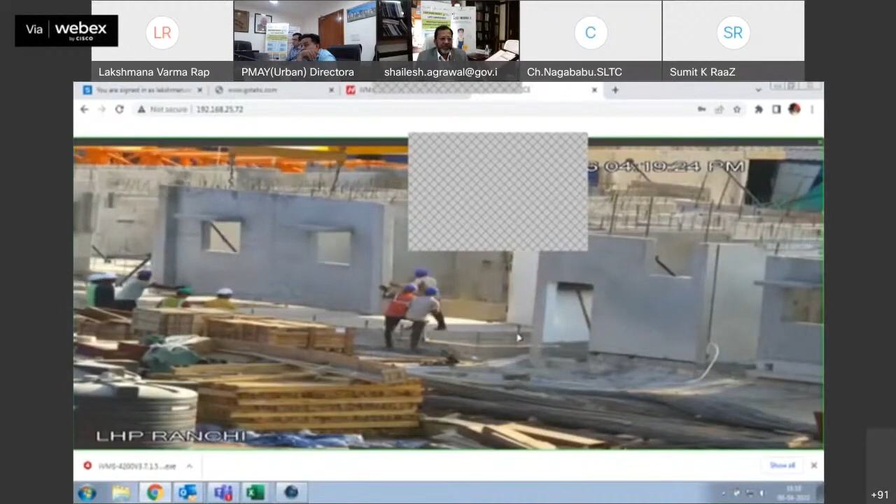So this alignment is the time-taking part. This takes 10 to 15 minutes to adjust it and insert it. Otherwise, to lift the element and take it to the location, it hardly takes 5 to 10 minutes.

So shall we go for the next activity?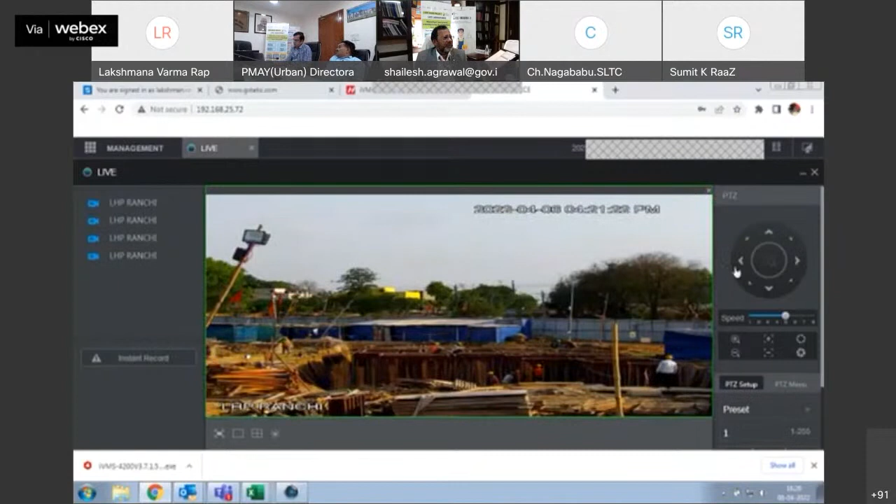This is the next stage after the shear wall. After completion of shear wall construction, we do the backfilling, and then we prepare the area for the grade slab. This is the casted grade slab - we have done casting today, and this area is being prepared for casting. We have an expansion joint between two blocks, so up to the expansion joint, one area is casted. Now the other part is being prepared, so reinforcement laying and shuttering work is going on.

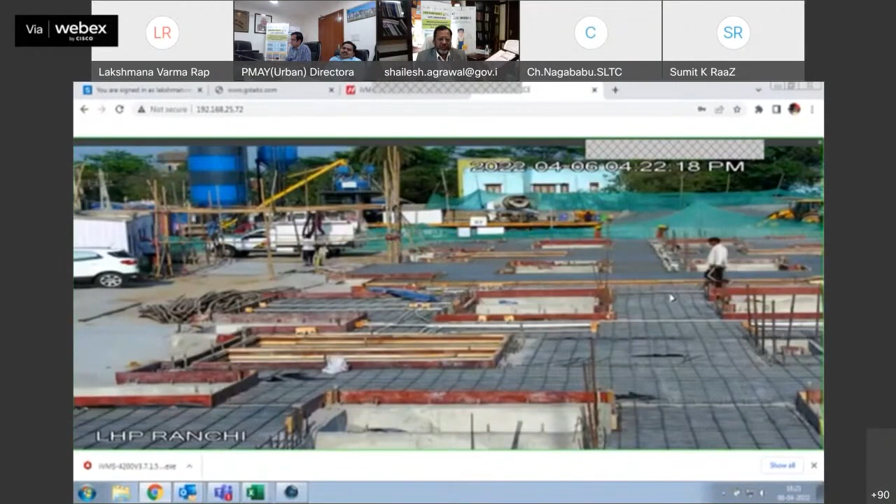Manishji, can you hear us? Manishji? Manishji, are you there? Hello, yes sir, yes sir, we are hearing. Nice, okay, fine sir, fine.

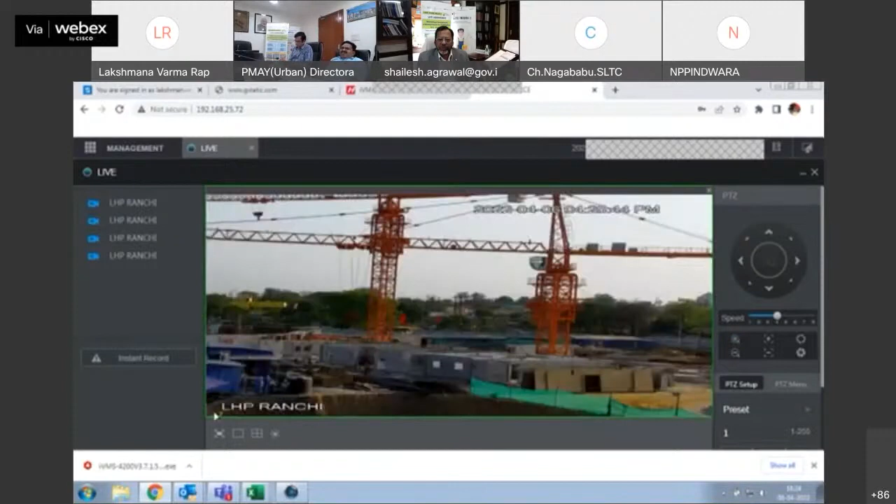So I'll share the picture. Just give me 2 minutes of time.

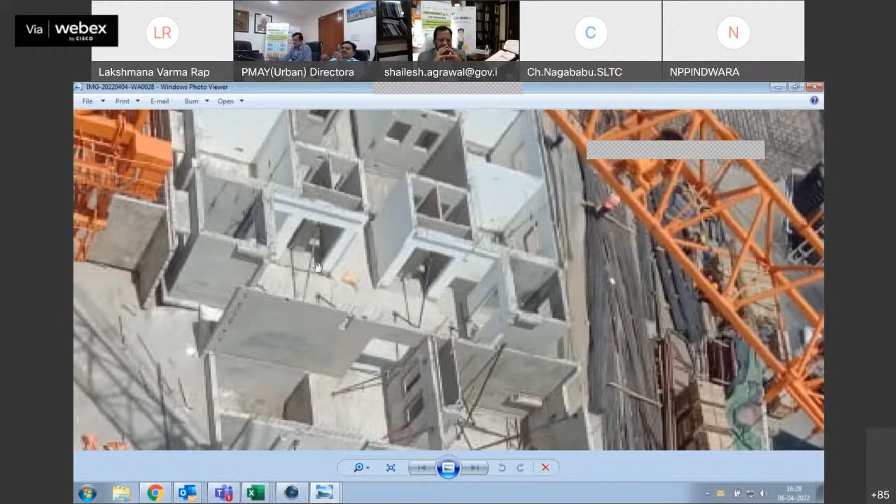This is a staircase area where we will install the staircase. So the walls are installed and grouting is being done here. And this is the lift area where we will install the lift, so this is the lift shaft. We have 2 lift shafts.

So these 4 apartments we have installed. Now we are doing the grouting. We have started finishing it.

Yes, sir. Sir, any queries? I think go ahead, go ahead. If you have shown everything, then fine. Yes, sir, we have shown everything. Okay, okay, thank you then.